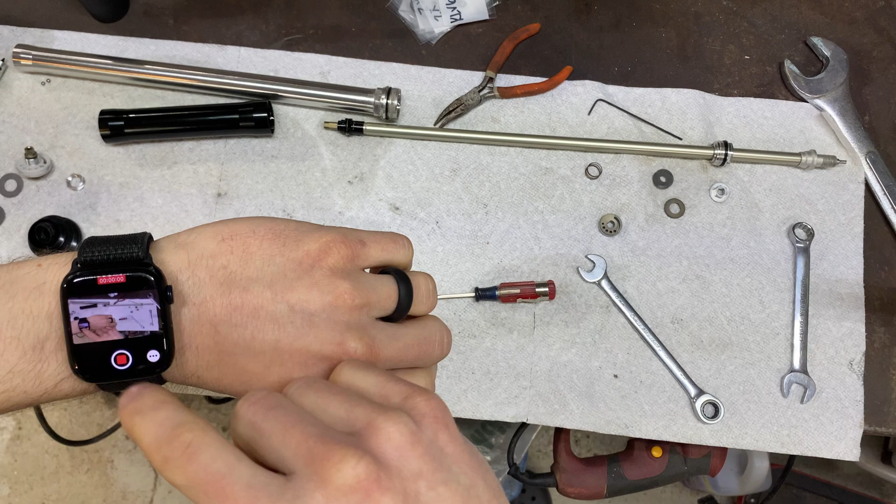All right, I am not Steve. This is not Vorsprung Suspension, and we are not in Whistler, BC, Canada, but this is the Sunday Tune.

Right now we're looking at the damper from my new RUX that I got on my downhill bike. It's not new, it's new to me. It's a 2017. This is the PCS R2C2 damper, so it's got adjustable high and low speed rebound and compression.

So I got this thing all apart because I haven't been too happy with how it's been working, especially the rebound. But before we get to that, let's go over how this thing works.

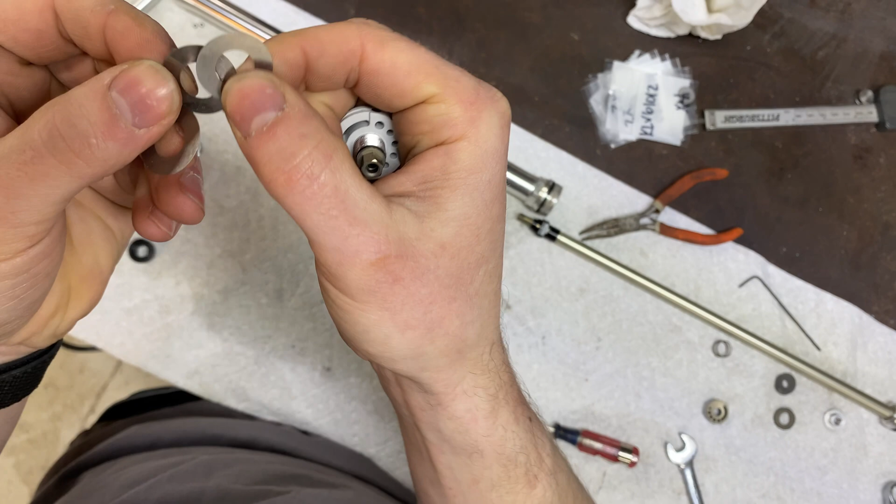And then for the actual high-speed shim stack, we got these 3 shims here. They're all the same size, and there's only 3 of them. I'll go through all the exact details of the shims when I look in Destacker or Restacker, but the main thing to take away on the compression shim stack is, because they're all the same size, they're all crimped.

There we go, they all got crimped in, I guess, 5 years of use. I don't know when they actually were crimped, but when you get crimp lines in the shim, they're toast. You want to avoid that when you design a shim stack.

So the low speed compression adjuster on this is also a little weird. It has this little needle valve here that moves in and out with your clicker, but it's also spring loaded. So what ends up happening is most of the time, almost all the low speed compression settings, except for like totally super full open, no, you actually have to overcome that spring force on the needle in order to enter the low speed circuit. It's really weird, and it's a pretty stiff spring.

So it's almost kind of like they're trying to make a pedal platform, but this is a downhill fork, so we don't want that. You can see that's the amount of push down on that thing, and that's basically it. This is the fully closed low speed compression circuit. It has to compress the needle that much just to get the needle to open.

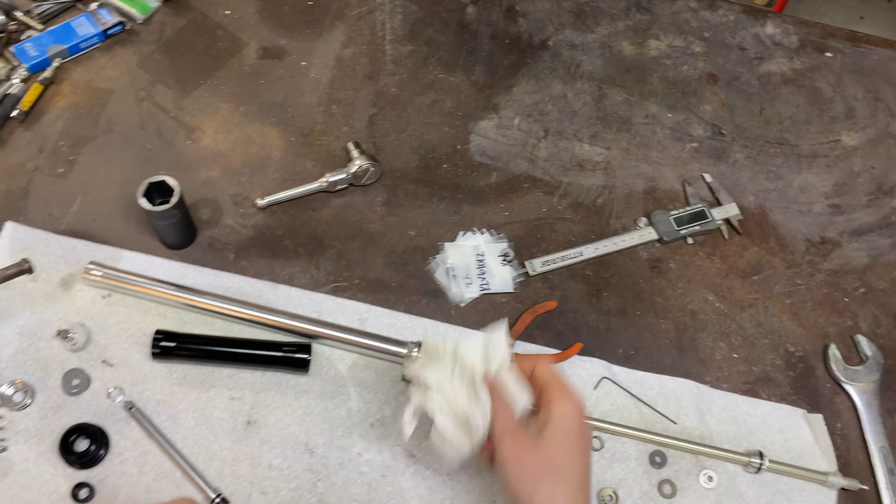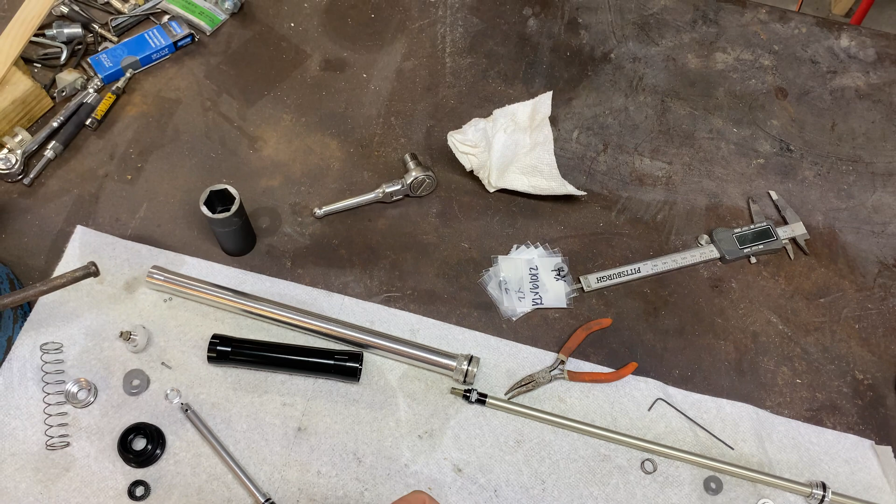But the compression circuit from a riding perspective really hasn't been all that much of a problem. It wasn't too offensively bad. The only thing I found is I was running it full open at my 155 pounds. So I put some lighter damper fluid in it. I think they use like a 30 CST Motorex, I don't know what weight that is off the top of my head, like 10. And I just had some RockShox 5 weight, which is like 15 CST.

But the real issue comes on the rebound side. The high speed adjuster works the same way, where it's literally blocking off ports with the check valve.

But then the problem comes from the low speed rebound. At my weight, even at the lightest low speed rebound, it was way too slow. Even with the lighter damper oil, that really didn't help that much.

So what I ended up doing in Restacker is I actually built bleed into the high speed circuit to try and just get less low speed rebound. So I'm gonna go ahead and open Restacker and look at how my shim stack was supposed to be and put this thing back together.

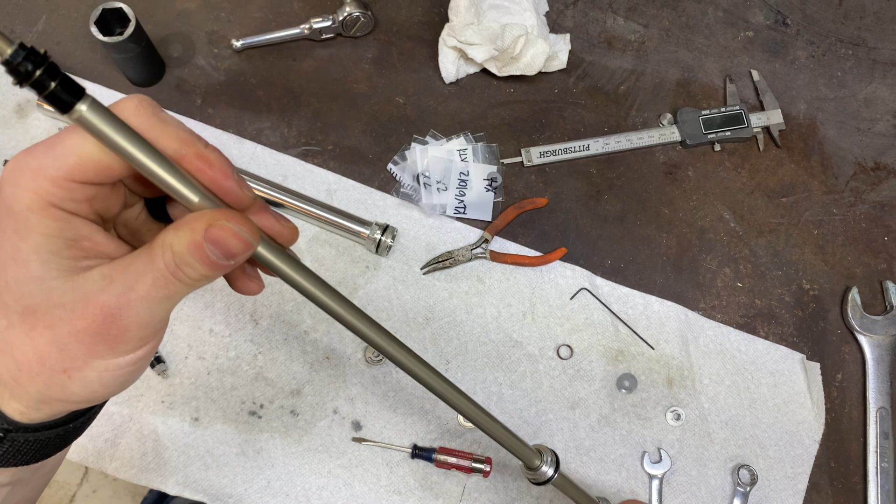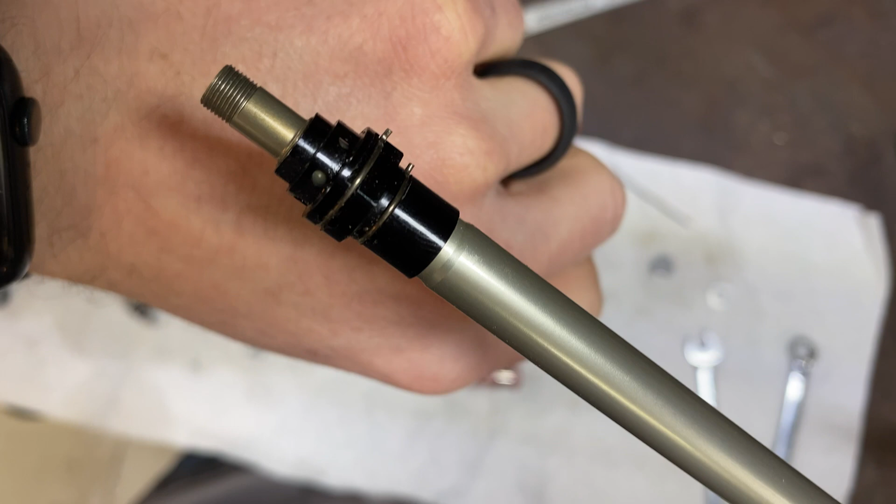Oh yeah, another weird thing to note is the high speed rebound also kinda changes the low speed, even in the factory configuration, because of these ports. They open and close into the low speed circuit depending on the position of the high speed. They're kind of opening midway up into the needle, so they probably don't have much of an effect, but it's just strange. You can see I went from full open on the high speed to one click from full open, and that hole now goes midway up the low speed needle.

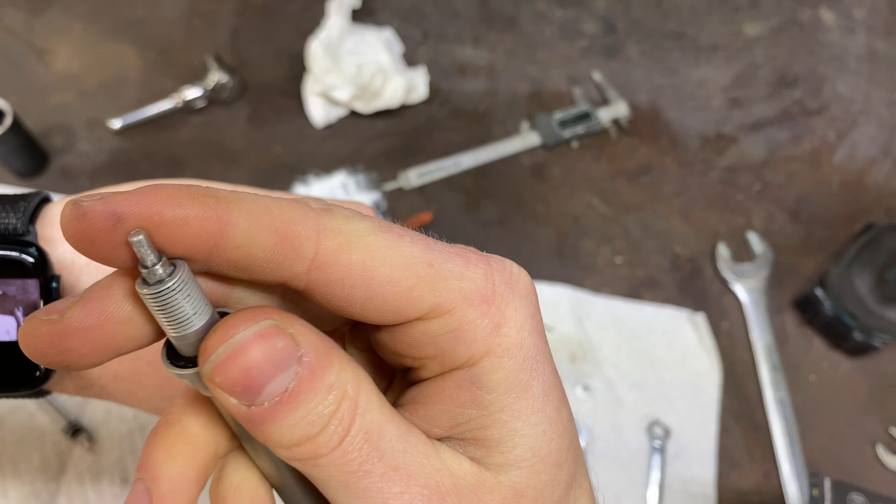The low speed needle doesn't have any weird BS with the spring actuation. The other issue is the needle, the adjuster for the rebound's a little exposed, and the shafts are aluminum, so you can see this one's all dinged up. There's almost nothing left for the high speed to grab on. So I might end up having to build this back up with epoxy and then refile the hex flats onto it to make the high speed work again.

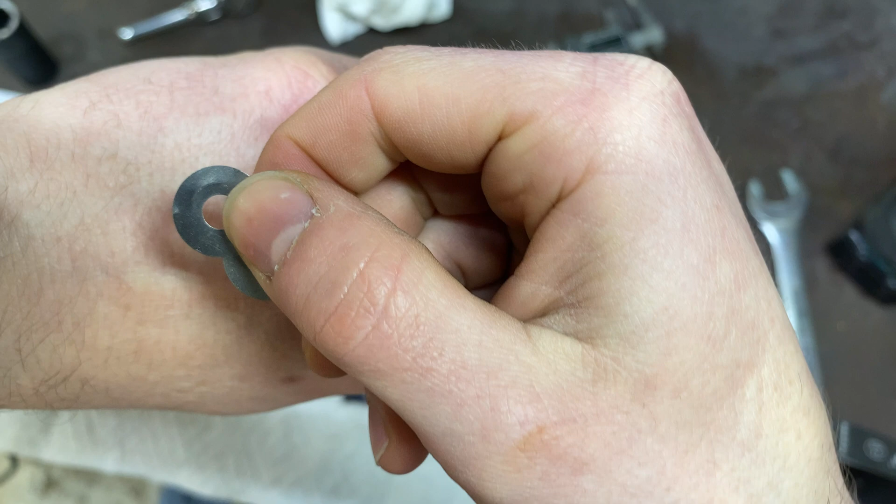Okay, so also same thing with the rebound, with the compression, but even worse on the rebound is, look at how crimped these are, it's almost splitting. So this thing was probably another season away from the shim stack just breaking, which obviously is not good.

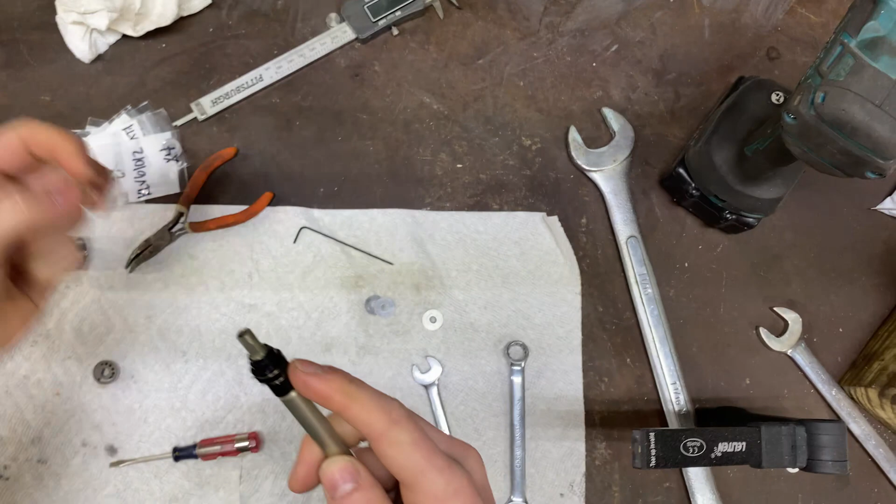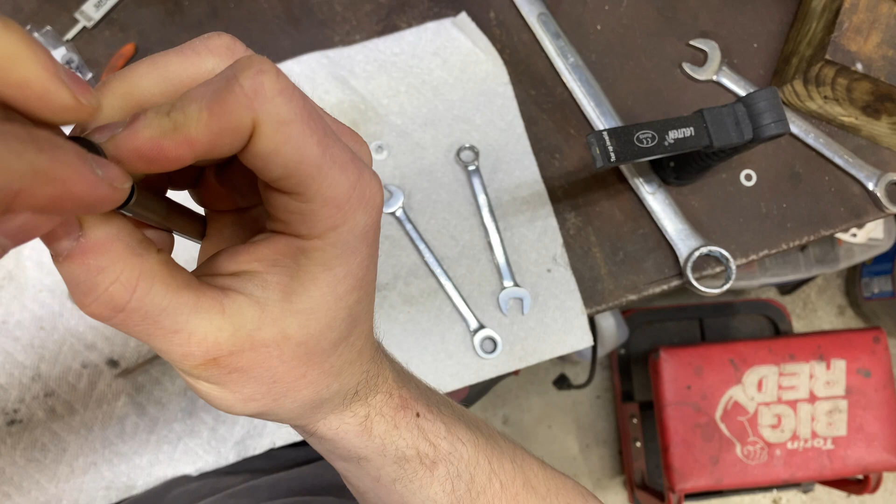So that stuff's keyed. So we're doing a 10 by 0.1.

See, that doesn't cover the port like at all. So there's my extra low speed bleed.

And then we're doing a 16, which is the standard outside diameter. We're looking for the one that says 6/1610 - this one here. And we're doing one of those.

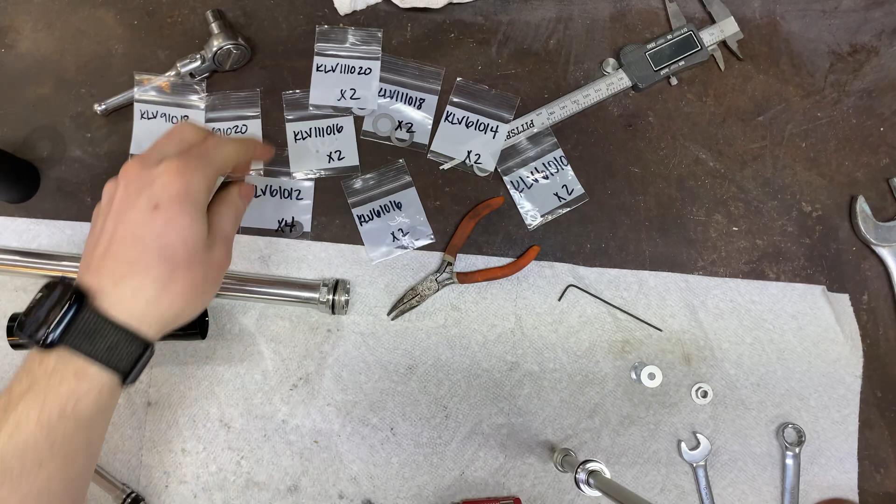Then we're doing a 6/1410, or sorry, a 61014.

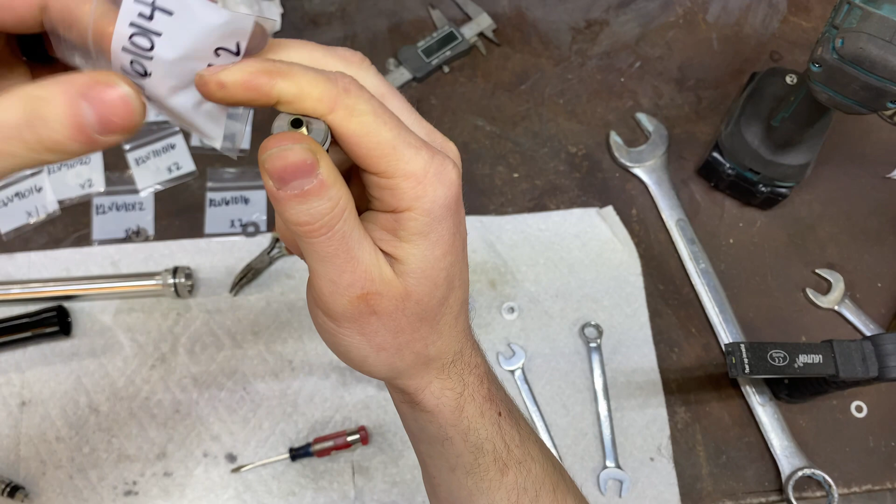Come on. Oh, we dropped it. Oh, we dropped it again. Get in the bag, motherfucker. Oh, I think that was the first F-bomb in this video. Probably wasn't. We made it past 8 seconds, boys.

6, 10, 12, to finish off the shim stack.

So you can see, like, what do I have 2 of these? No, just 1, I don't know why. Oh, I think I have the 12. I think I bought extra 12s in case I wanted to decrease the amount of bleed on the first shim, because it'll partially cover the holes.

So you see on my shim stack, I taper the shims. The reason I'm doing that, and literally everybody else who does shim stacks does that, is so you don't crimp the shims. When you have this tapered shim stack, the point that the shim flexes about is different for each shim. When you do all your shims the same diameter, they all bend at the stop nut diameter, so you end up bending all of them right there, and they experience more stress and get crimped like that.

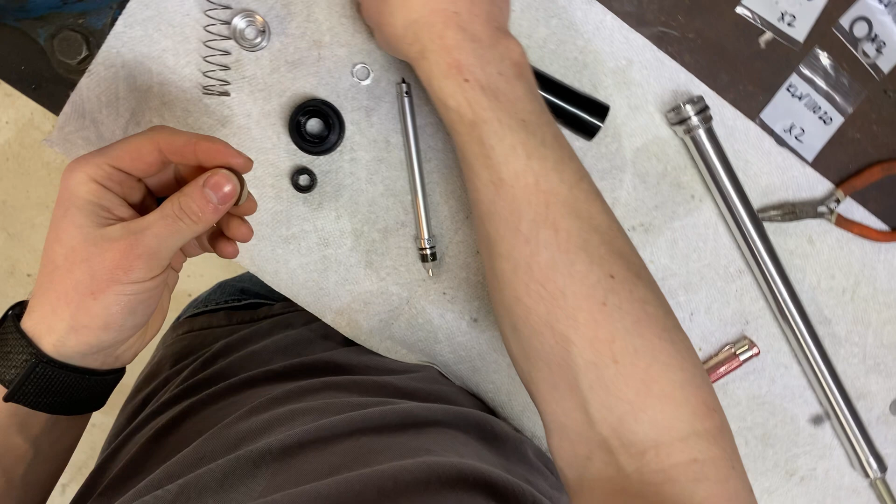I think it's going to be fine. What's a little bit more low-speed bleed? I can always close it.

What's funny is, yes, I'm... ooh, that one's dirty, that one's got like hair on it... I'm changing this shim stack. It doesn't have... but I'm not... according to ReStackor, I'm not changing it that much. And I think that's a function of the porting on this.

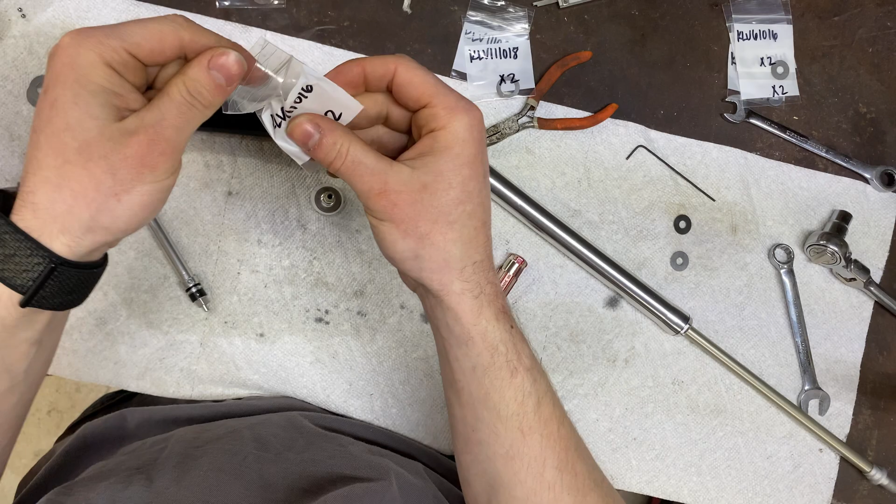It's just so restrictive that I hardly changed the high speed by going from 3 shims that were the same OD and thickness to 3 shims that are tapered.

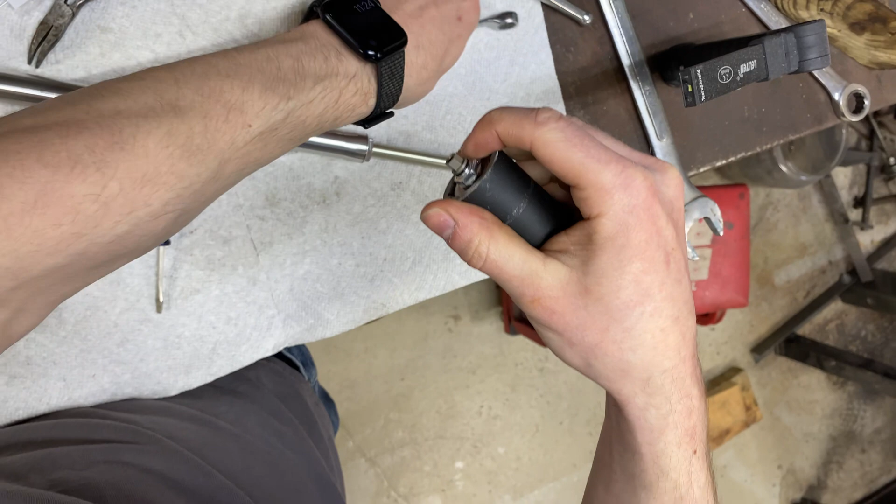Oh, shit. That ain't that. I don't know how I did this before. I guess we kind of held it like this, and used the wrench. How the hell did I loosen this? Like this. Click.

Okay, and then how the heck did this go back together? That goes there.

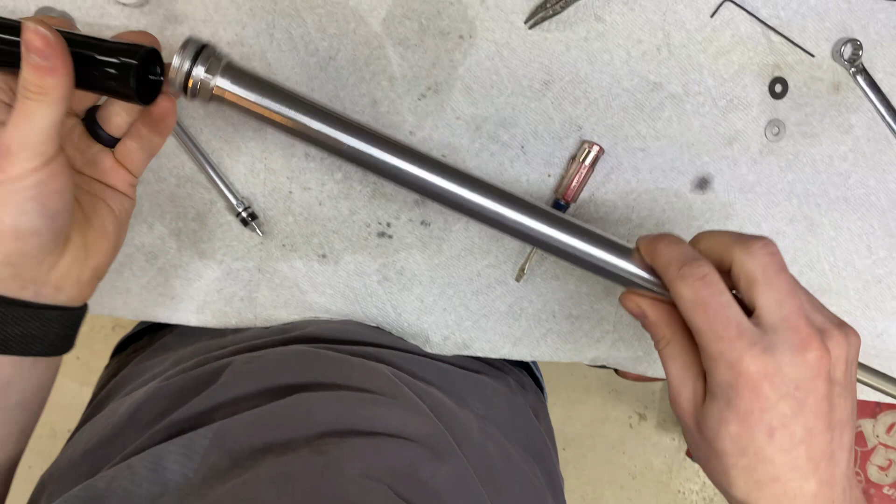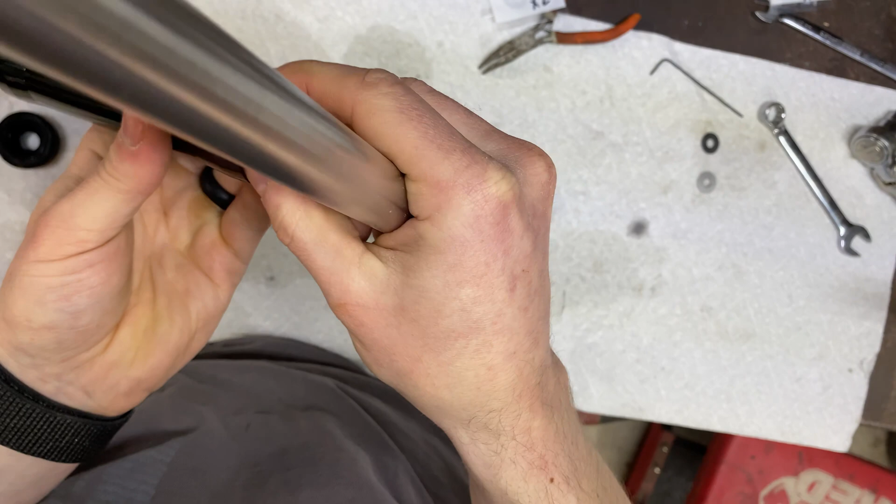Okay, that's where the base valve goes. Nope, must be this way. Oh yeah, there we... oh fuck me. This pin just prevents the assembly from turning too far and pulling out. So that's how this goes together. The base valve goes into the bottom of there. Duh.

Oh, that didn't feel right. Yep, I had the base valve crooked. Now it's seated correctly.

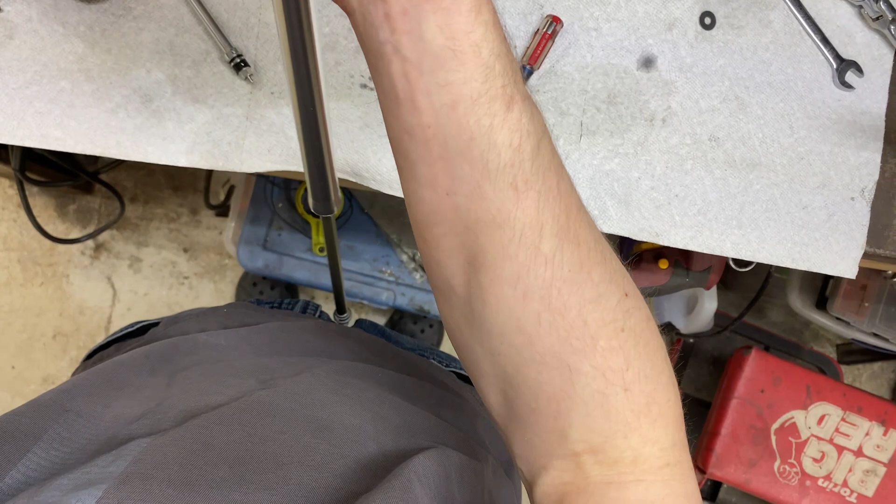Okay, so how do we tighten this back together? Well, like so. I took the foot nut off. That's why I have this diameter, but that was unnecessary. So we're gonna put the main body in here. Oh no, first we're gonna put the rebound body in here so that we can tighten the gland nut in for the rebound.

Oh, you need to spend $200 on the BBI thing to work on your freaking shocks. Nah, get out of here.

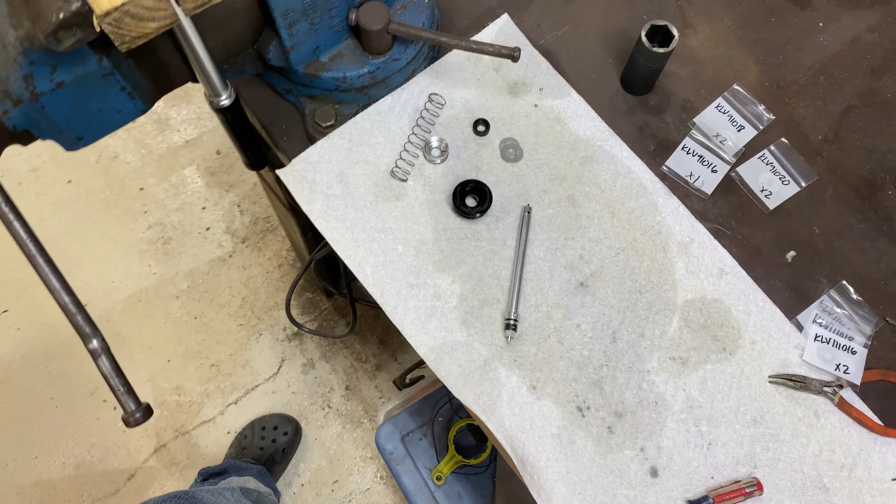You just need a random scrap of wood, a saw, a drill press, and the right size drills. Yep.

Why did I put it awkwardly upside down like that? And I don't have the right drill? I mean the right wrench? You'll see. Well, I don't have the right wrench for this for some reason. But I put it so that I'm going to have an awkward time tightening this, because I was too lazy to take it in and out of the vise again, because now we're going to fill it with suspension fluid to bleed it.

And I got to go get suspension fluid. There it goes. That wouldn't close. There we go.

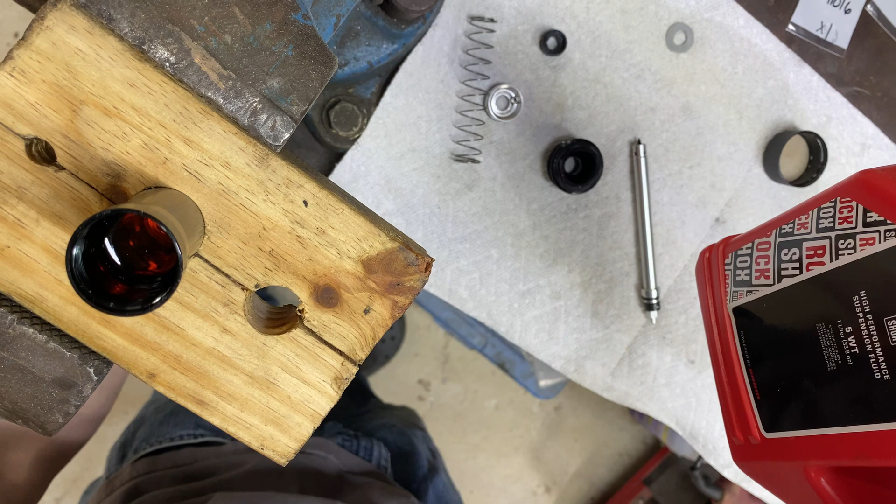I don't know if you can hear that over the sound of my heater.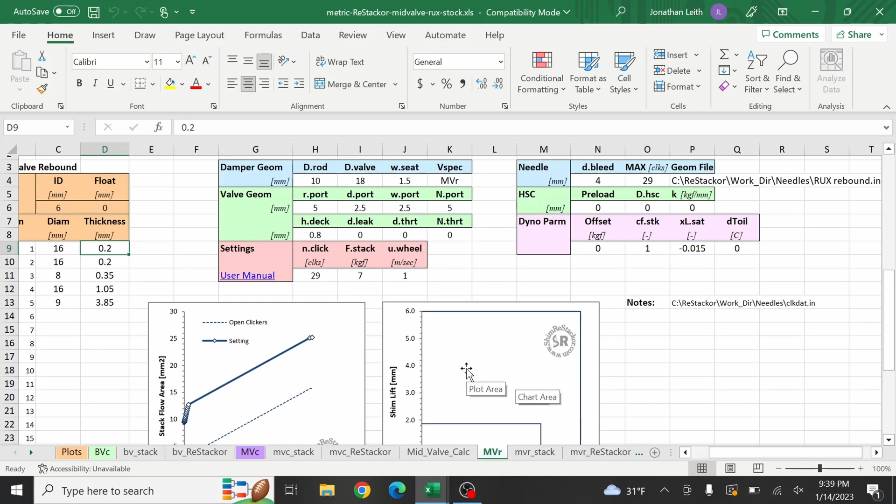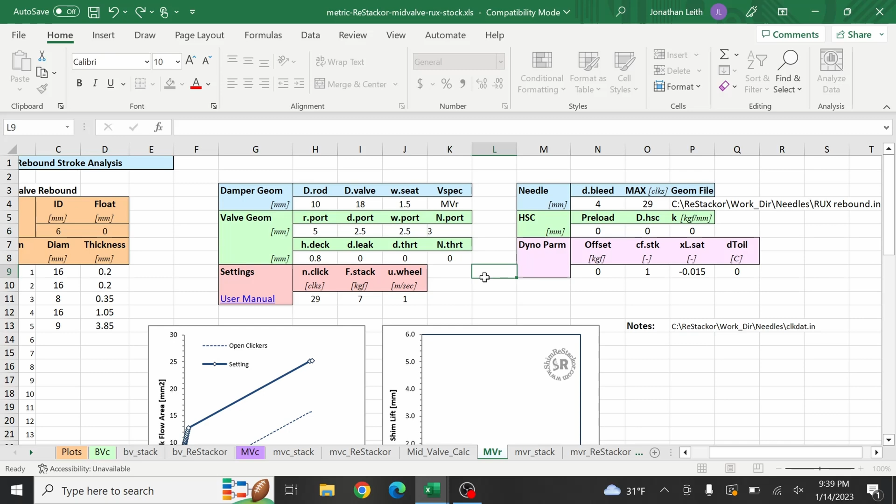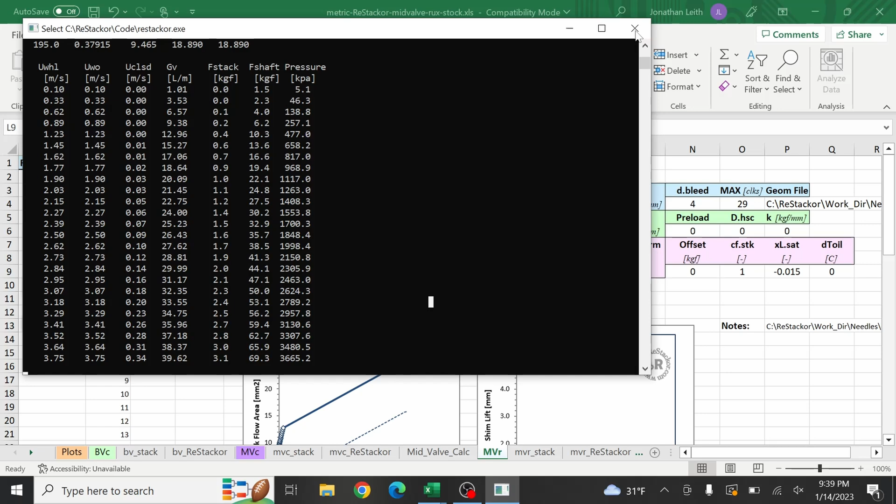And this is more or less what we're getting for damping with the high speed all the way open. So close the high speed, like in the middle. Interesting. That's not cool, okay, let's try again.

It's being weird, I think it's because of OBS. Okay, there we go. You can see it starts to pick up again. Close it all the way down. Did it again.

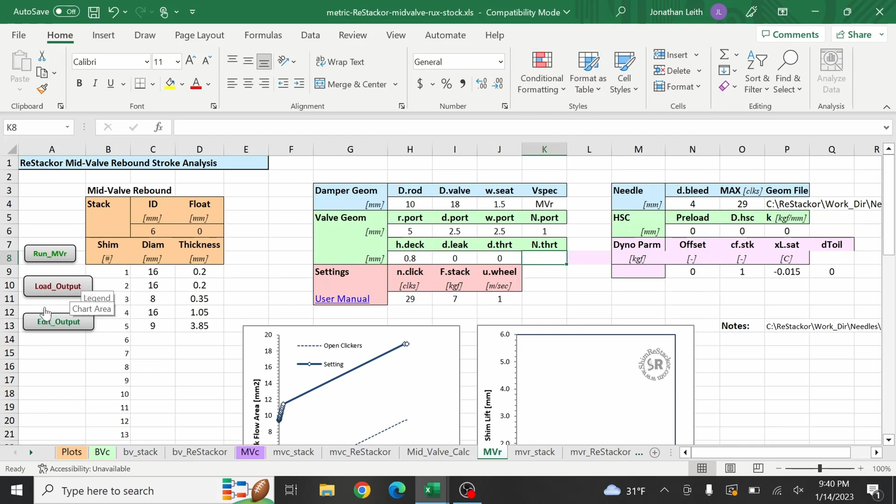Probably should check, does this work? Oh okay, there we go. Now you can see, if I was closing the low speed clicker, it'd be going real crazy. So put that back.

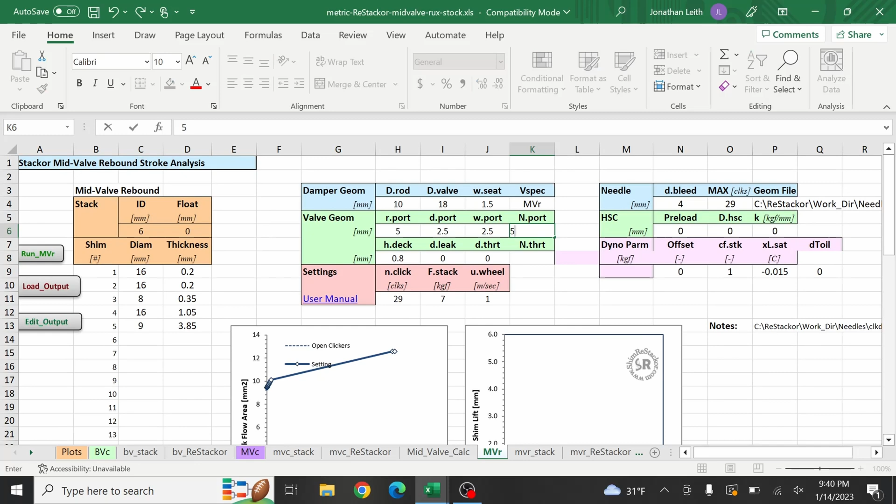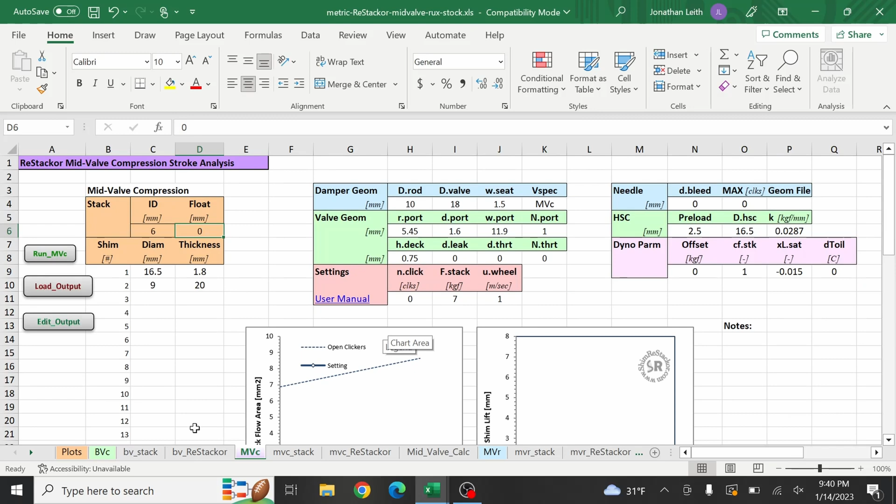We'll ignore the mid compression valve. I tried to model it in here, but it just freaks out, it doesn't understand what to do with just a check valve. So, and this is the base compression, and this is what I was running it at: 10 clicks from closed out of 16, 1 click closed on the rebound.

You close the high speed all the way, you get something that looks like this.

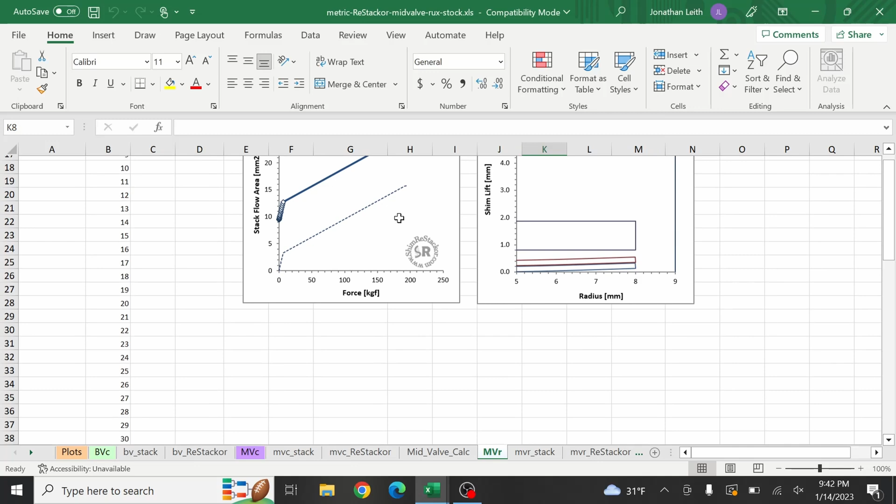So on the valving I ended up going with, oh let me rerun this. So what I ended up going with for rebound valving is that 10mm shim to create an extra bleed is 0.1, a 16, a 14, and a 12, all 0.1. This is the same stack thickness as the original stack, same clamp nut, and this is what it looks like closing the high speed 4 and going 9 clicks in.

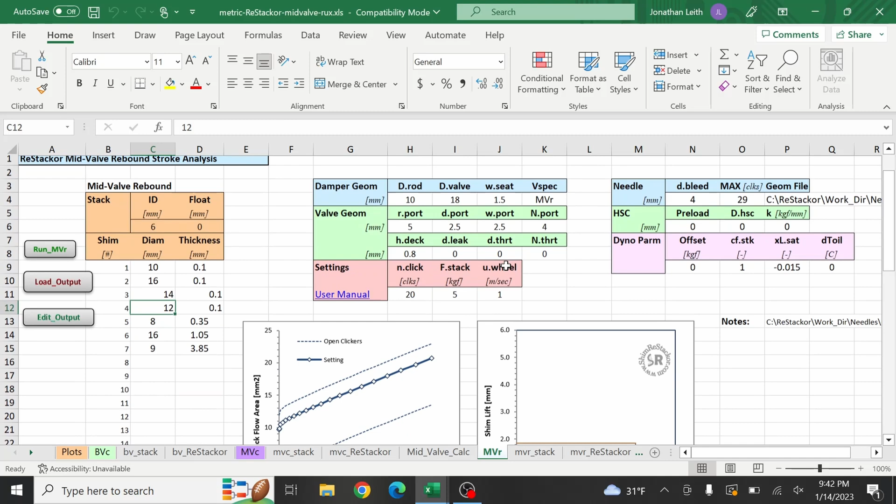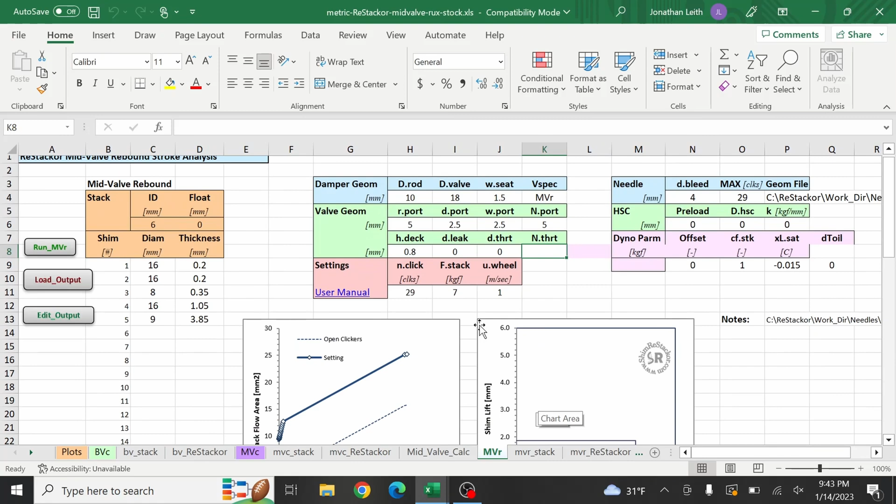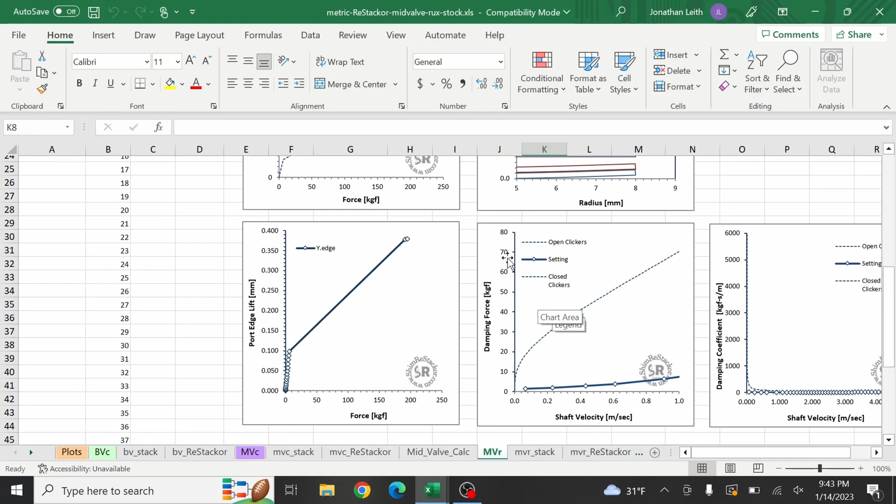So right there, 0.2, we're right about 2, and close to 5 at 1, and then we go here, 0.2. Is this all the way open? Did I rerun it? Hold on, let me make the scales for Z the same, for Y. Just let it go off the scale. There we go.

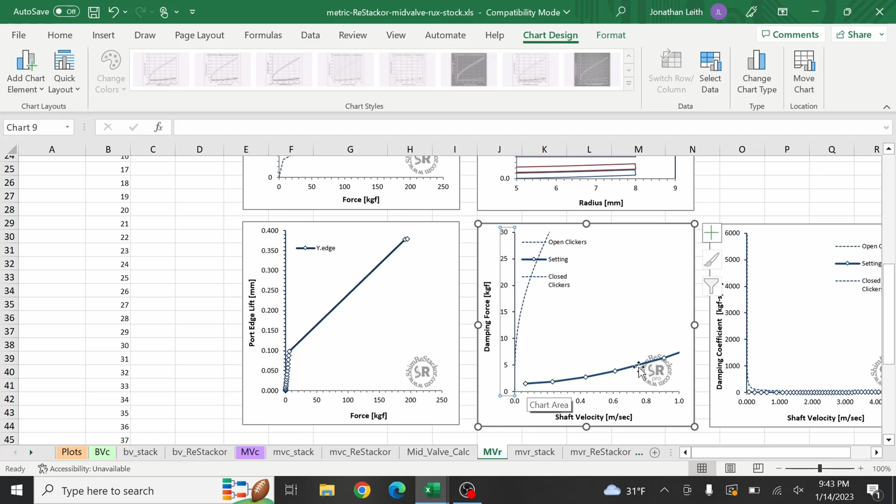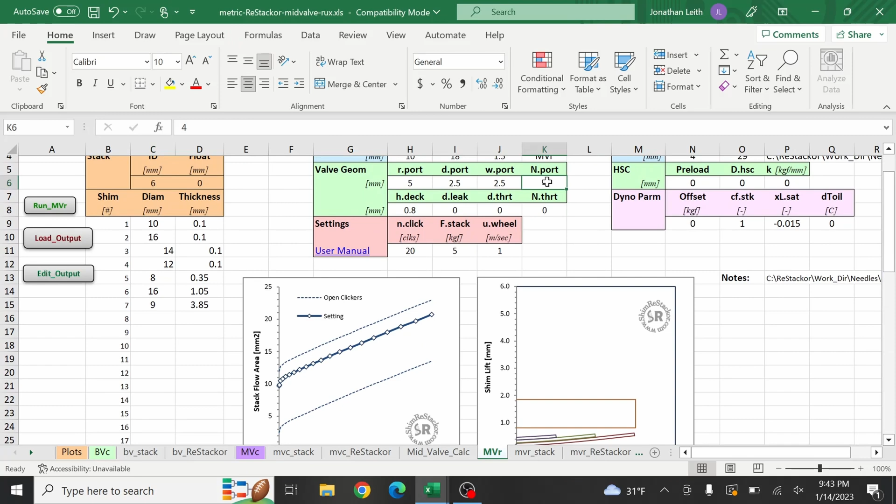So it's right about 2, and then, oh, I'd call it 6.5 at 1 meter per second. So I managed to soften it up. Maybe we go another click tighter on the high speed. What?

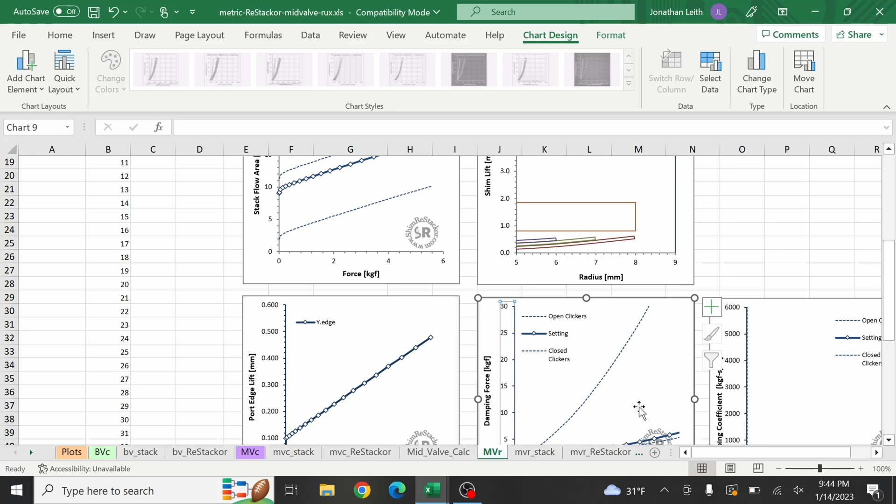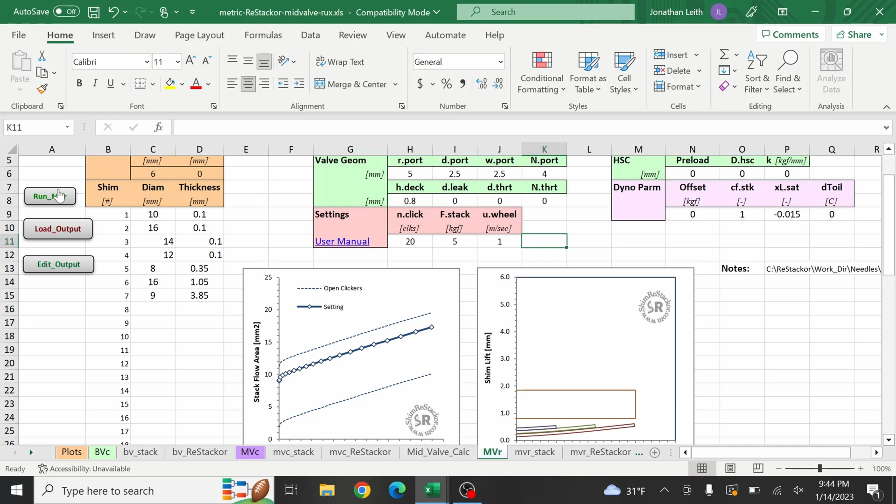Lock Y to 30. And we're getting there, but we did actually want this rebound to be faster. Oh boy. Okay. Oh wow, that actually works.

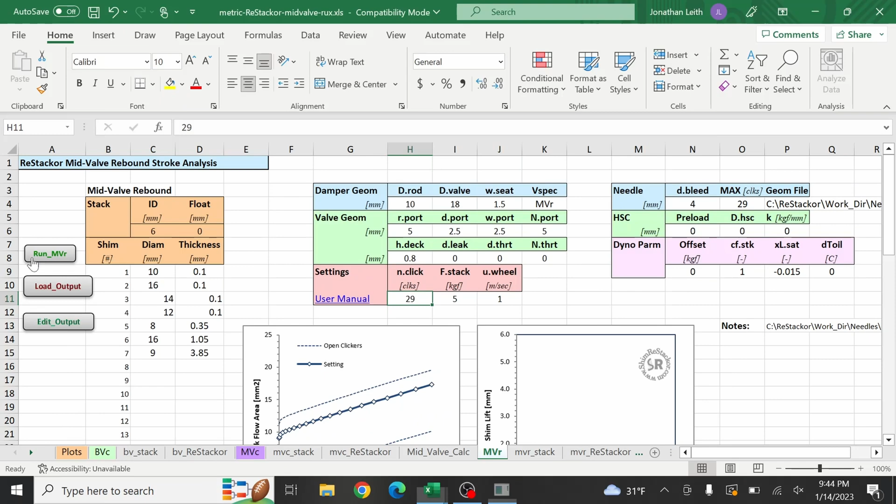And what you're going to see in the high speed was actually this. I still ran it full open because I need to reduce the force down here some more still, I believe.

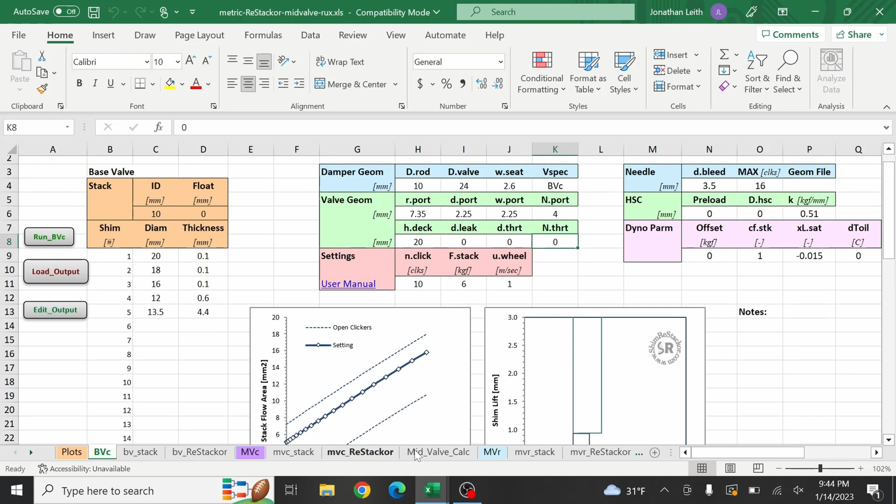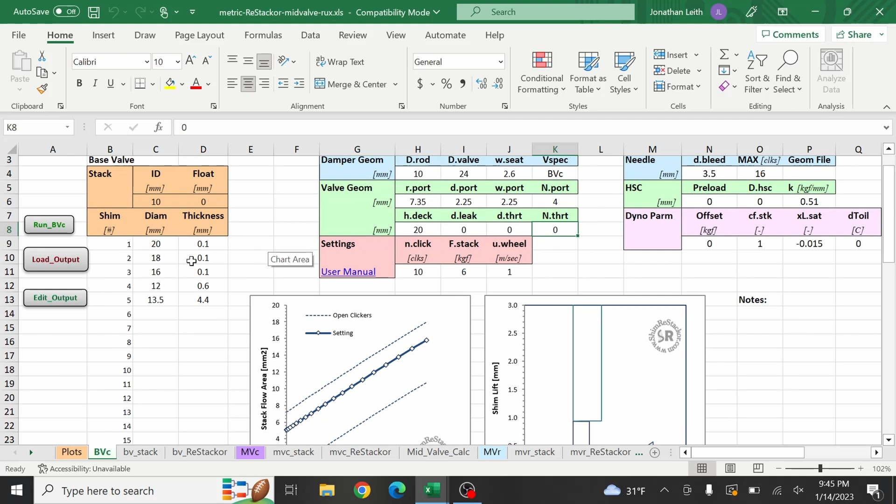But let's compare the base valves. So what I kept, the same stack thickness, I just went 20, 18, 16 instead of all 20s. Make this also 10.

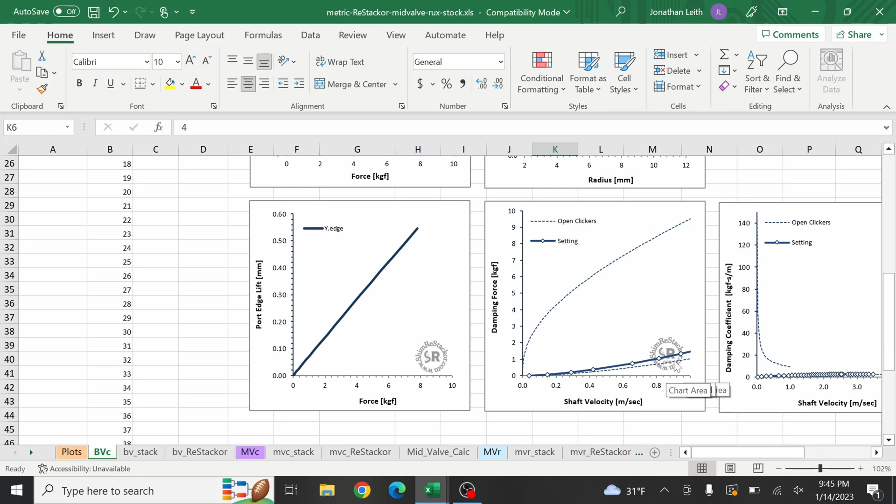And if we look back and forth, we're looking pretty similar. Got almost nothing, and like 1 1/3 versus basically nothing, about 1 1/4. And that's with the same clicker settings. Really didn't change too much.